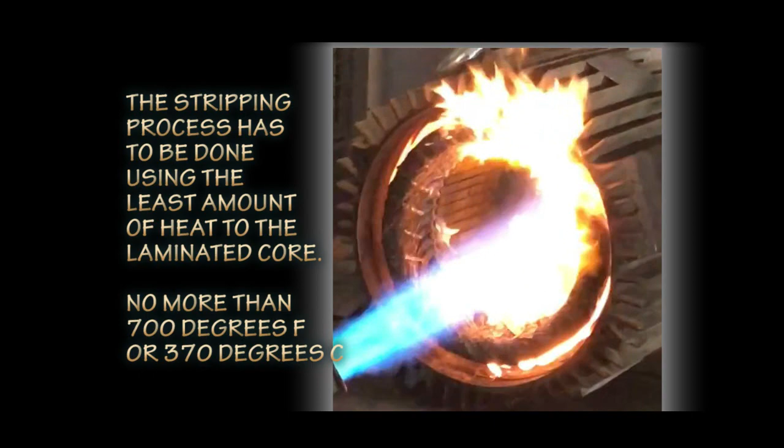Stripping coils from an AC stator and a DC armature. Burning and removing AC stator windings. The stripping process has to be done using the least amount of heat to the laminated core, no more than 700 degrees F or 370 degrees C. Using a torch as shown in the video is not having much control over the temperature of the laminated core or casting that the core sits in.

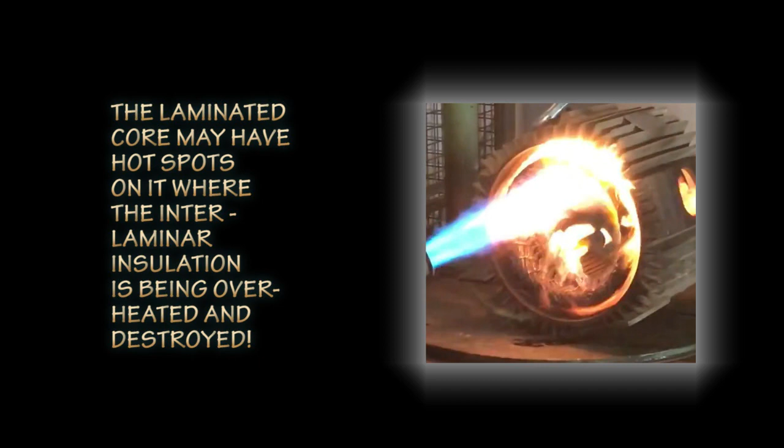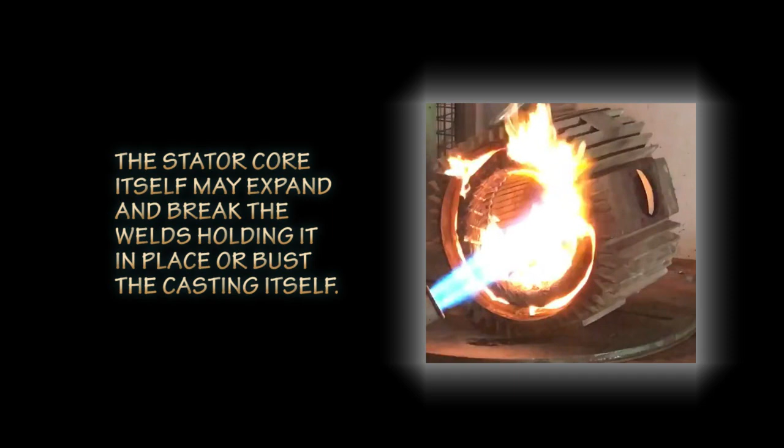The laminated core may have hot spots on it where the interlaminar insulation is being overheated and destroyed. The stator core itself may expand and break the welds holding it in place or bust the casting itself. The burnout should be done in a controlled temperature burnout oven at a temperature of no more than 700 degrees F or 370 degrees C.

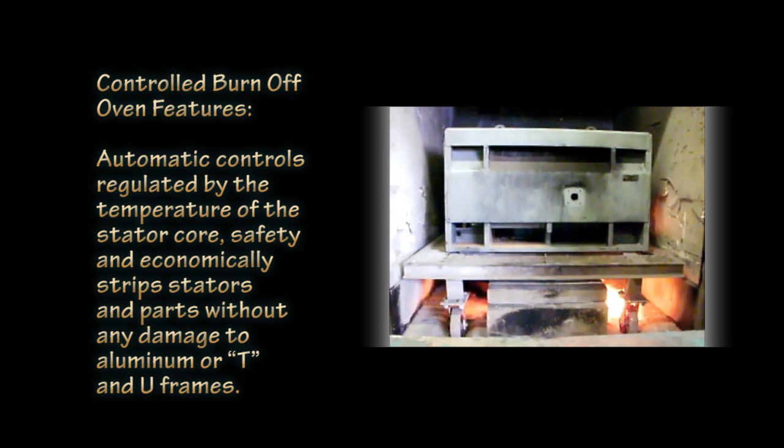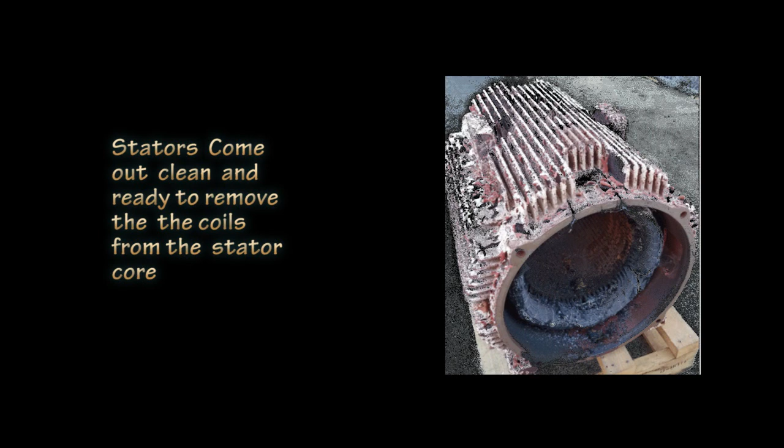Controlled burn-off oven features automatic controls regulated by the temperature of the stator core, and safely and economically strip stators without any damage to aluminum or T or U frames. Stators come out clean and ready to remove the coils from the stator core.

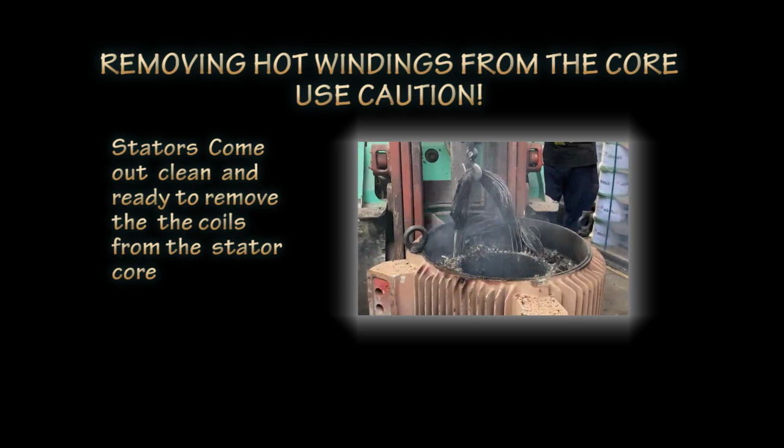As an alternative to a burnout oven, the windings can also be removed from a stator core by manually stripping copper from the slots. This can be difficult at times, but if done right will not damage the laminated core. In this video the end turns are removed from the stator core using a chisel and hammer. Care must be taken so that the laminations are not scuffed by the tip of the chisel.

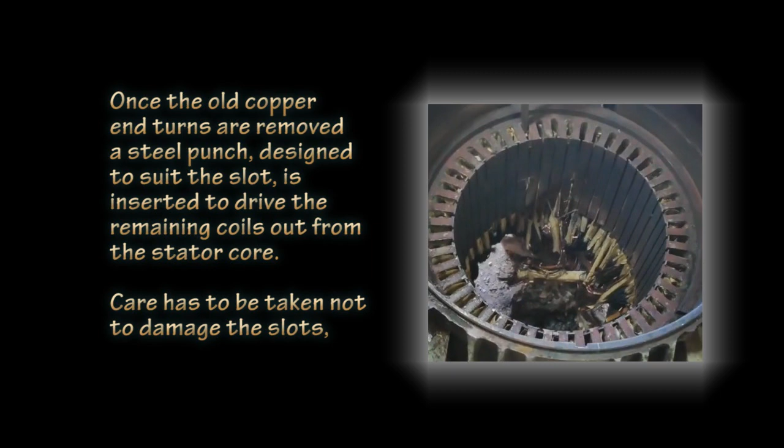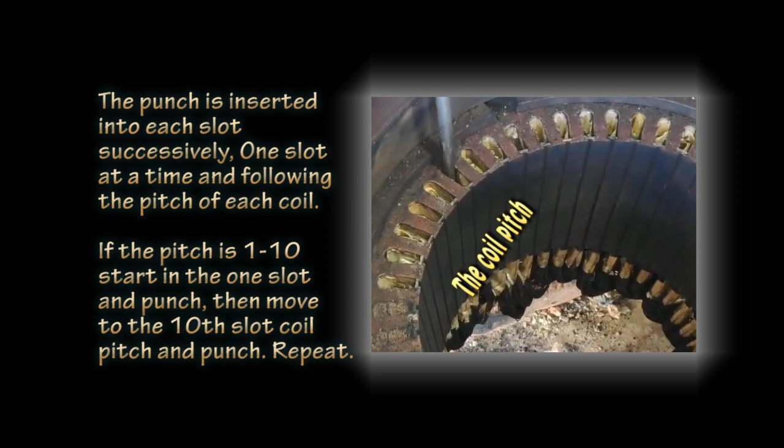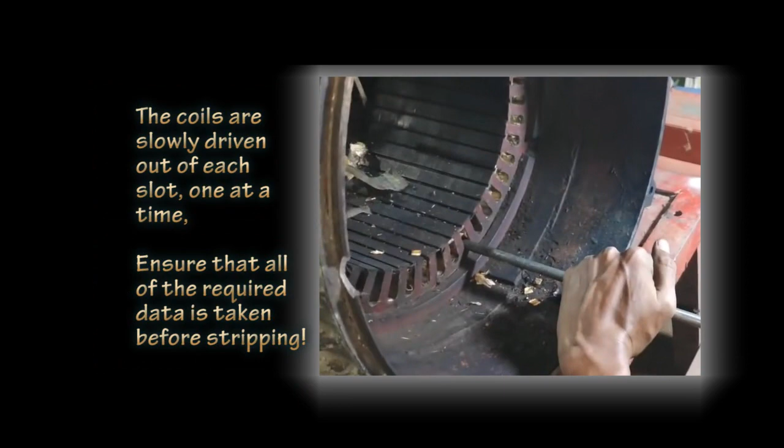Once the old copper end turns are removed, a steel punch, designed to suit the slot, is inserted to drive the remaining coils out from the stator core. Do not damage the slots. The punch is inserted into each slot successively, one slot at a time and following the pitch of each coil. If the pitch is 1 to 10, start in the 1 slot and punch, then move to the 10th slot coil, pitch and punch. Repeat. The coils are slowly driven out of each slot, one at a time.

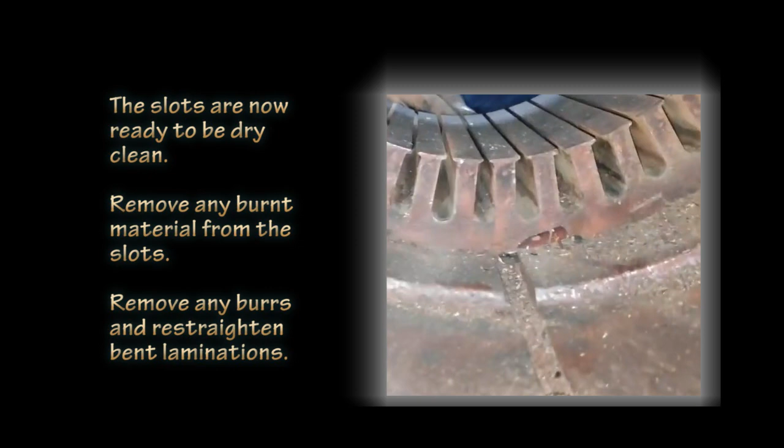Ensure that all the required data is taken before stripping. The slots are now ready to be dry cleaned. Remove any burnt material from the slots. Remove any burrs and straighten bent laminations. Once clean, it is given a coat of red insulating lacquer.

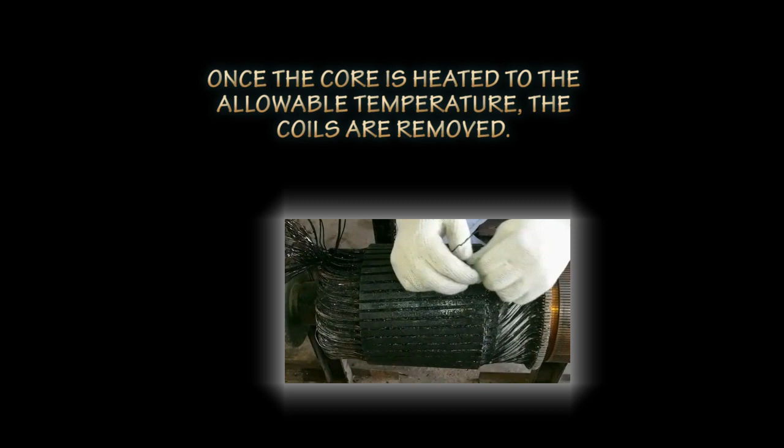Burning armature windings. Burning and removing armature windings without excessive heat can be challenging. The armature core cannot be overheated, resulting in insulation damaged between the laminations. Once the core is heated to the allowable temperature, the coils are removed. Once the coils are removed, the slots are cleaned using a small torch.

Refer to Textbook 4 for more information. Caution has to be used when doing this.